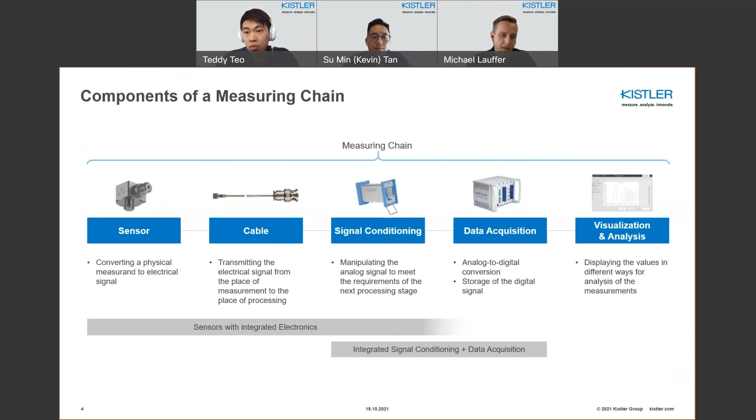So if you have the task to measure something, to select sensors and electronics and data acquisition and so on, to get some data, what do you do? You have to think about what you really need. And for that, we have a little checklist, and I hope this helps.

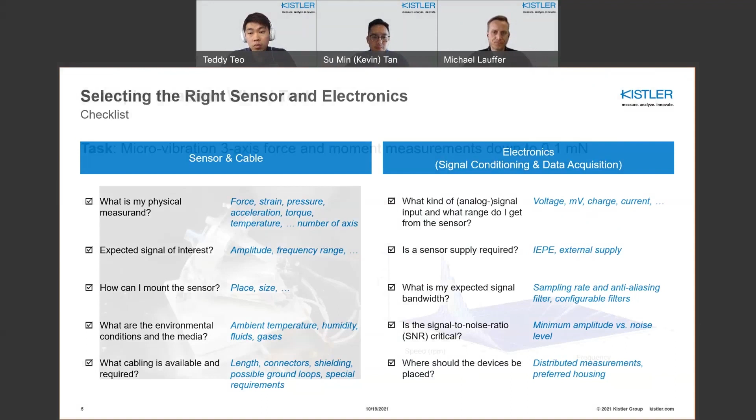So this for the checklist. So in the next couple of slides, we will go through an application as an example. And I've selected this very nice application about a reaction wheel test. That's this device here on the left side. And actually, it's about satellites, so space application.

You may know that nearly every satellite has a so-called reaction wheel. That's a rotating mass inside, which is used to do the fine positioning of the satellite. So if this rotating mass is rotating slower, then the satellite goes in the one direction. If it's rotating faster, then it's going in the other direction. So that's the main purpose of this reaction wheel.

Now if we assume that's a satellite which takes pictures from the Earth, maybe for weather observations, or just for doing photographs of your country, then it's very, very important that the satellite remains really stable in space. So every little vibration on the satellite would harm the quality of the picture. So it's really crucial here that this rotating part is not influencing the satellite with these micro vibrations.

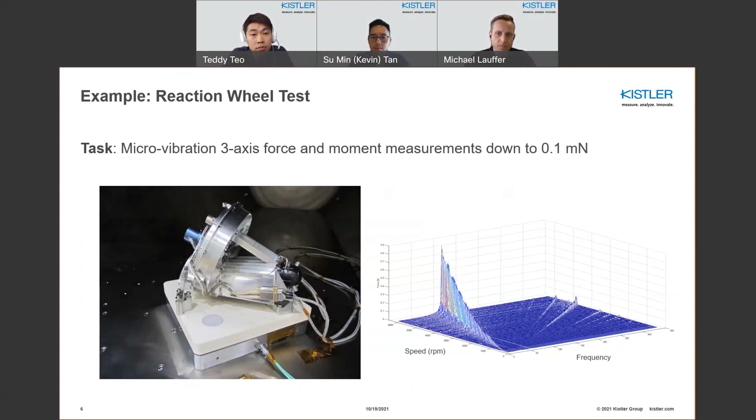And the goal here is, first of all, to measure all these vibrations, and second, to find ways to reduce these vibrations in order to have a better quality of the satellite pictures in the end. So that's a short introduction about the application, and we will go now step by step, selecting the right components for that. So first of all, let's start with the sensor.

Here I have again the checklist for the sensor selection with already the results or the conclusions. So for this application, we want to measure forces and moments. For that, you could use strain gauge sensors or our piezoelectric dynamometers, like here in the example. That's exactly the point here.

What's my expected signal? In this case, they're really small vibrations. We know from experience that the measured forces are in the range of 0.1 millinewtons. That's not a typo, that's really millinewtons, up to 1 Newton. So really small signals. But this whole installation with the rotating wheel has its own mass. So if we placed such a mass on a standard strain gauge sensor, we would measure mainly this mass, but not the vibration.

So here our Kistler piezoelectric technology really has advantages: we can place the mass here and do like a tare. And then we can really measure all the small, really tiny forces. So it's really an important step here. So in this case, how can I mount the sensor, where is it placed? In this case, it's a laboratory measurement. So I need a little bit of space to place the sensor and the satellite part.

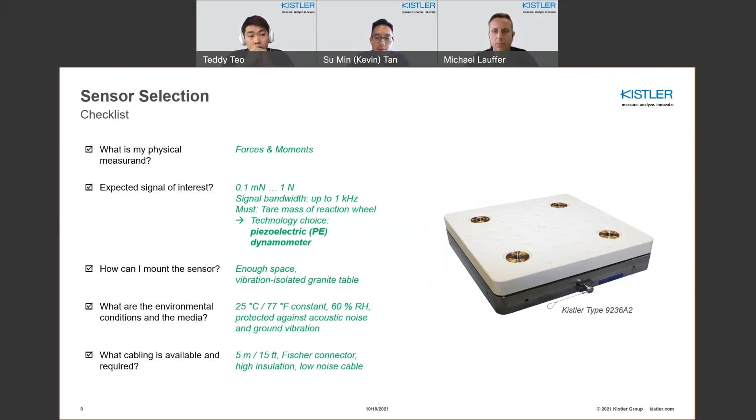As I mentioned, for piezoelectric sensors, you maybe know, if you work with them, that we need a high insulation cable, just to prevent the signal from drift. It's no big deal. But also maybe important is that if you move such cables, they can introduce noise. So it's important to keep the cable from moving, or to use low noise cables. That may be important depending on the application.

And also here, not only with charge signals from piezoelectric sensors, but also with other signals, voltage signals, cable length may have an importance. Cable capacitance may reduce the frequency range on one hand, and may also increase the noise level. So as I said in the introduction, the cable may be important, so take care about that.

General statement here for charge measurement is up to 30-meter cable length with frequencies below 50 kilohertz and charge values above 500 picocoulombs. That's no big deal, but just to keep in mind, think about it and clarify if this is the case.

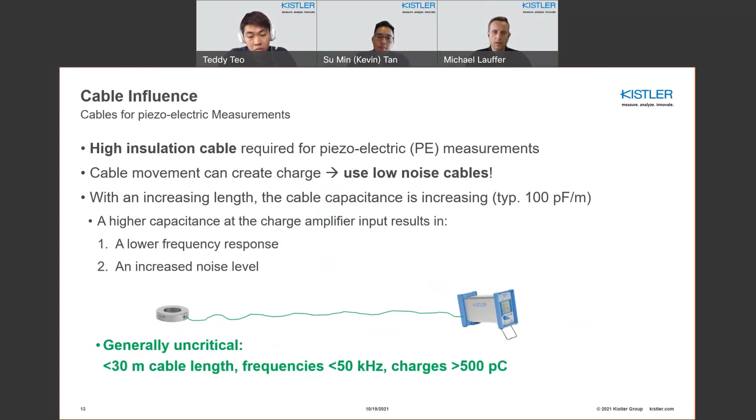So the next component in this measuring chain is the signal conditioning part. And I mentioned that nowadays most of the electronics include signal conditioning and data acquisition. But exactly for this example, it makes sense to use a dedicated signal conditioning device, and I'll just explain why.

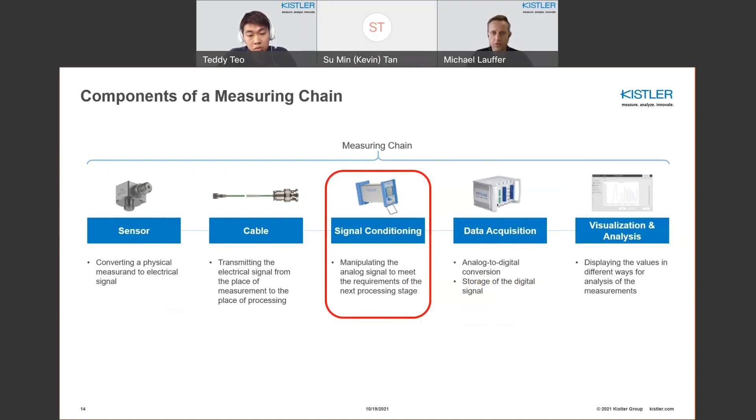Again, here with this very, very small signal we have, 0.1 millinewtons up to 1 Newton, we expect a charge range from the sensor from, I have to read the numbers, 0.0004 picocoulomb up to 10 picocoulomb. That's a very, very small amount of charge. That's some electrons, not many more, let's say it like this.

The advantage of a charge sensor is you don't need a power supply. It's kind of an active sensor. If you press the sensor, it generates this charge automatically. I will explain it on the next slide. The expected signal bandwidth here is 1 kilohertz. So the rotating speed is not that fast, maybe 10, 100 rotations per minute. So not that high signal bandwidth expected.

So 1 kilohertz signal bandwidth, as a rule of thumb, you would have to choose the sampling rate 5 to 10 times higher. So we go with 10 kilosamples in this application. And linked to this very, very small charge range, signal to noise ratio is very critical here.

So that's why we've chosen this Kistler charge amplifier, which is really the best in class amplifier. And I don't say that only because I work for Kistler. That's really the best charge amplifier which you can get on the market. It's also not cheap, I have to confess. So for this application, this is really critical, so this is the way to go. Therefore, an external device, really a dedicated charge amplifier and not integrated. Again, if the application is not that critical, an integrated charge amplifier is also okay.

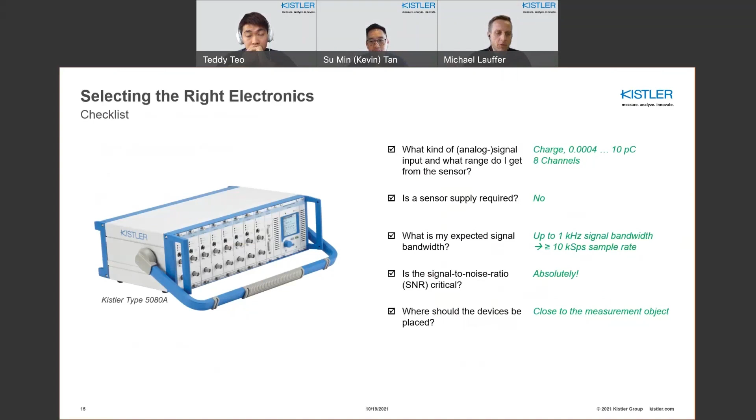So then I digress just for one slide, for those of you who are not really familiar with the charge technology. So we have here the principle of a charge sensor and a charge amplifier. The charge sensor consists of a crystal, or how it's called, maybe you can help me with the English name. Yeah, a crystal. It's a piezo element, which generates a very small charge if you apply a force or pressure or something like that on it.

So with every force, it generates a negative charge value, here in this sine wave simplified. So force, and then we have a charge value. And charge is kind of a special electrical signal. You can't measure that directly. So therefore, you need this charge amplifier. The principle is actually quite simple. That's an amplifier stage which is built as an integrating amplifier, actually an inverting integrator.

So the charge is flowing from this sensor into this capacitor. That's a so-called range capacitor, and this generates the output voltage in the end. And since it's an inverting integrator, the negative charge signal we get out of a positive force will result in a positive voltage in the end. That's the good thing about that.

Okay, so let's go to the next slide. I've said in this application, noise is very critical. I don't want to go into detail here about noise because it could be really a huge topic. Just a short introduction. If you compare the electronics or also sensors and so on with noise values, it's helpful to remember these 3 types of noise specifications.

So the first one is actually very simple to understand. If you measure the noise over a certain time, we just look at the signal and read out the peak value. That's easy to measure. The difficulty here is the longer you would measure, there would be somewhere a real big spike, and if you measure just for 10 seconds, 30 seconds and define the noise specification, then you don't get everything which can occur. So maybe here it's a big spike, which would really increase the peak-to-peak value. So it's, as I said, easy to understand, but not very good to describe noise specification.

Second possibility to specify noise, and that's my favorite one actually, is the so-called RMS, root mean square. So the noise signal is kind of recorded, and then the square root of all the values is generated, which creates kind of this mean value, this root mean square value.

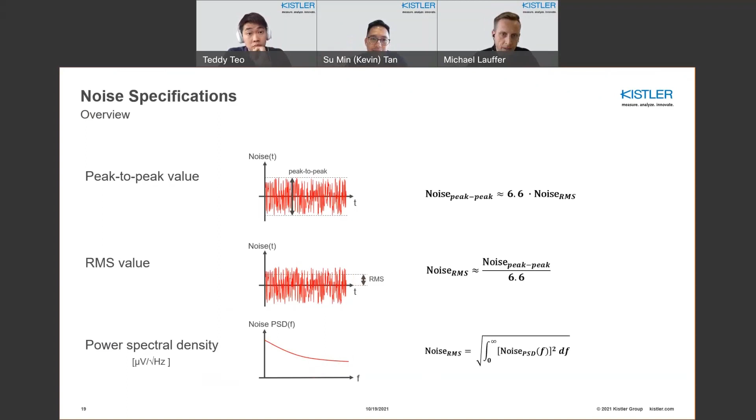Just a little hint or a little trick. If you want to compare the noise values, and if you compare it mainly with the RMS value, there's a rule of thumb. If you have a peak value, you can divide it by roughly 6.6, and then you have approximately the RMS value. That's really a rule of thumb, which is true for real white noise, but in the real world you don't have 100% white noise, so it's really an approximation.

If you have values from this power spectral density, then you would need to take the square root of the integration of all these noise values. Yeah, you can calculate that, it's possible, but it's also not easy to understand this whole specification here, because the unit of such a noise value is microvolt per square root hertz. I can't imagine that, so that's why my preferred specification is RMS. Okay, so I go ahead.

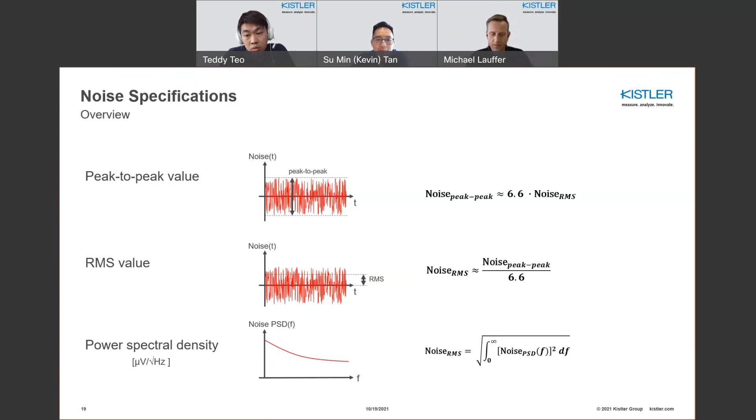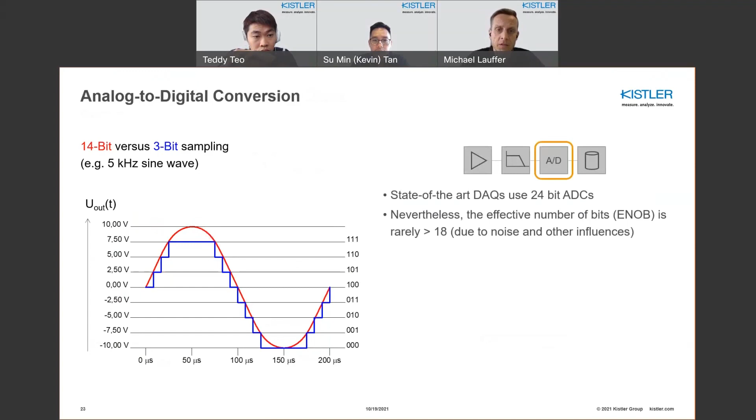That's fine. And actually, we can say state-of-the-art data acquisition systems have already 24 bits. In the end, with the noise which is in the whole system, the effective number of bits is maybe 18 or slightly above. So if you have 24 bits, that's far more than enough.

The second important characteristic of AD conversion is the sampling rate. So that's actually the horizontal resolution. You probably know it: how many samples, how many values per second I get from the ADC. Most of the time it's configurable in the data acquisition system.

Here the thing to consider is more is always better on one hand, so you get a better resolution. Also to fulfill the Nyquist-Shannon theorem, which says that you need a sampling rate which is at least twice the expected signal bandwidth. So from this perspective, higher is always better. But you have also to consider, especially for longer measurements, the more samples you take, the more data it generates.

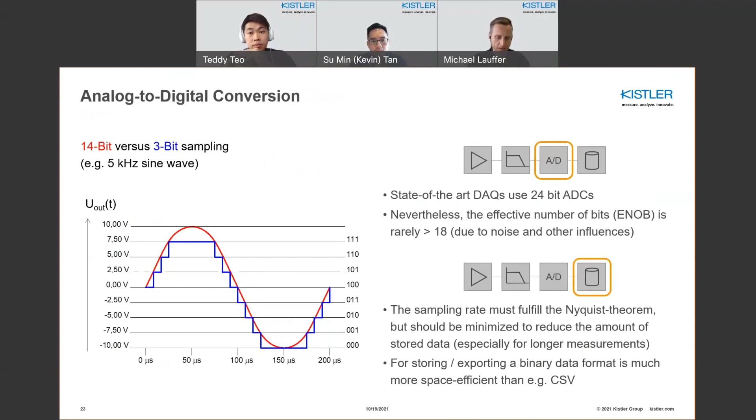Okay, so I mentioned the Nyquist-Shannon theorem. So from the theory, we know that the sampling rate must be at least twice the expected analog bandwidth, where we apply the anti-aliasing filter. That's a different topic, would be also worth a special webinar. So at least twice; in practice, actually, because the anti-aliasing filters are not ideal, we recommend to have a sampling rate which is about 5 to 10 times higher than the expected signal bandwidth.

And one kind of personal statement here, I always try to really distinguish between the analog bandwidth, which is expressed in hertz, and the sampling rate, which is expressed in samples per second. It's not wrong to express it in hertz, but I like to really distinguish, and I always talk about hertz of analog bandwidth and samples per second if it's about sampling frequency. This helps to use different units for these different values, because it's really not the same. Okay. So far to some little theory.

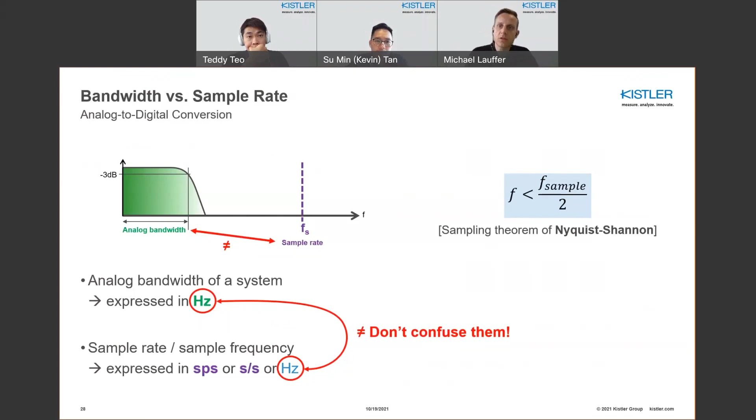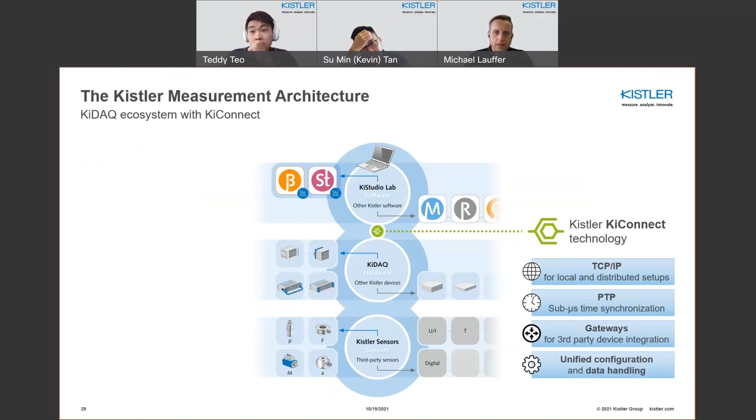Just a word or two about the software, the KiStudio Lab software. We built it to have an easy configuration, so it's really easy to handle. You just go through from left to right, and then you're done with the whole setup. That's really easy, and you can do live graphs, some simple analysis, and you can define triggers when to record the measurement, and so on.

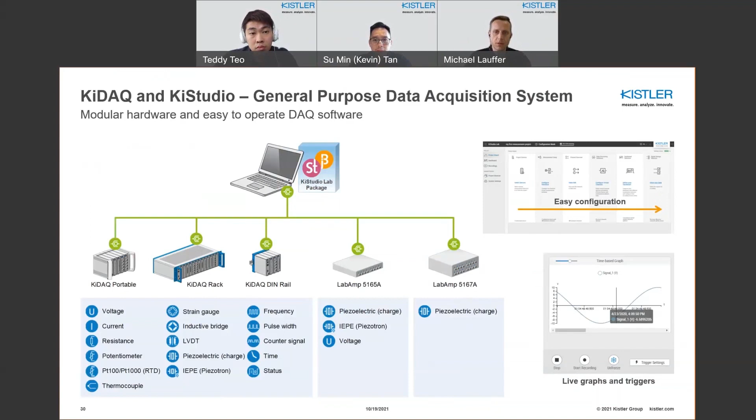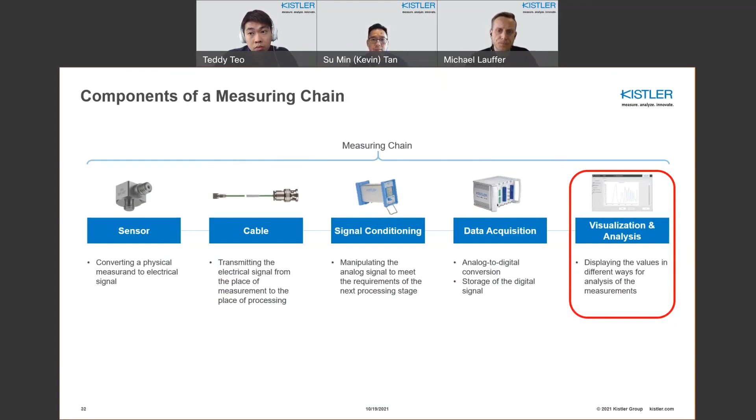So I move on to the last part of the theory or the introduction: visualization and analysis. That's actually the important thing in the end. That's the goal of the whole measurement, to have data to analyze, to innovate in the end, to draw conclusions and so on. For the visualization and analysis, we provide our jBEAM software. It's really a powerful tool, and we will see a live demo in a couple of minutes.

A really powerful tool with interactive analysis and automated reports. And I just want to explain this graph on this slide. Where is this software positioned in the market? We see many customers who are using Excel, for example, or another, how is it called, you know what I mean, a spreadsheet tool. I missed the word spreadsheet. So spreadsheet tools. Yes, you can use them to analyze measurement data, but they're really not intended for that.

Excel or the spreadsheet tools are intended for business data, financial data, financial business cases, controlling and stuff like that. It's really not for measurement data. That's not the right tool. On the other hand, we have very special tools like math tools like MATLAB, Octave, or measurement tools like LabVIEW. They're widely used in the world, and yes, they have their advantages. I have to confess that.

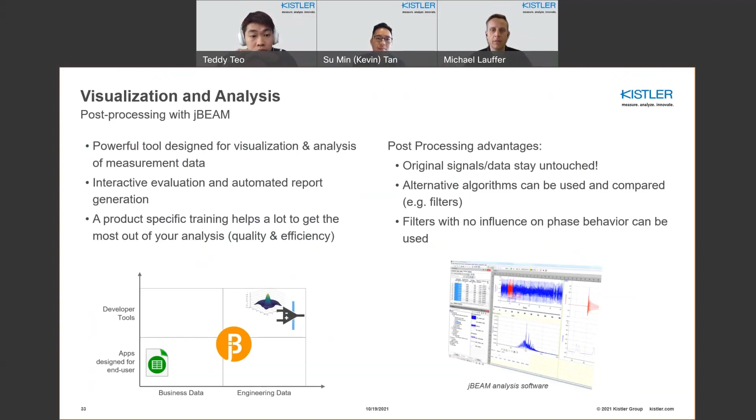Maybe a short comparison from jBEAM to MATLAB, a couple of features which are important from my point of view. First of all, import possibilities. With jBEAM, we support over 100 data formats, in comparison to MATLAB, which supports only standard data formats. Okay, you could do other data formats, but you would need external scripts for that.

Then, important from my point of view, quick measurement data analysis. Yes, with jBEAM you can do that. You just drag and drop the signals into the graph area, and then you see it. You can add analysis cursors really quickly for the analysis. In contrast to MATLAB, okay, a pro user is also quick, but then you're really a pro already and you do the programming quickly. But if you don't use it on a daily basis, you always need time to learn the syntax and so on.

Same for using formulas. With jBEAM, you just select and click the values you want to calculate, and you create your simple formulas. Here with MATLAB, it's only possible with programming. But I have to confess, it has a really extensive function set.

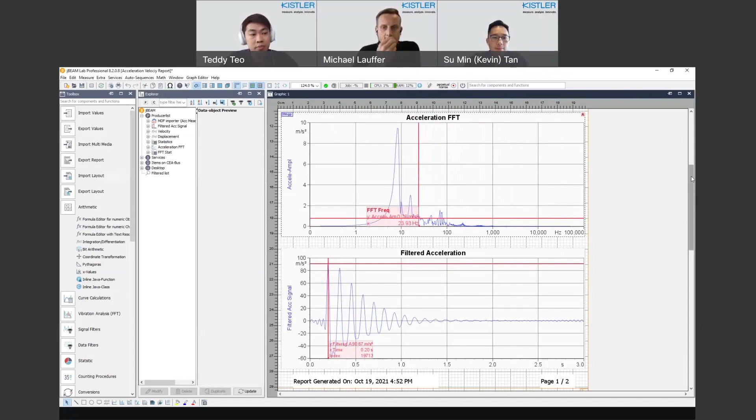So I set an interactive input for my low pass filter. That means that the frequency for my low pass filter is set by this cursor here. As I slowly move it to the left, we can see in real time that I'm filtering out more of the noise and my signal gets smoother. So I'll stop about here, and now I have my filtered acceleration signal without the noise, and I'm ready for more analysis.

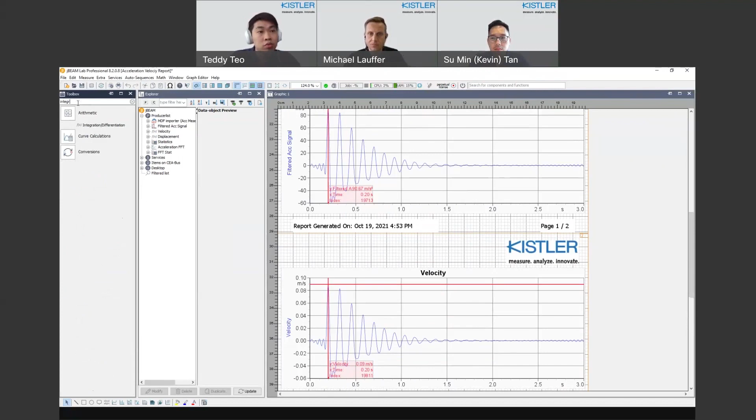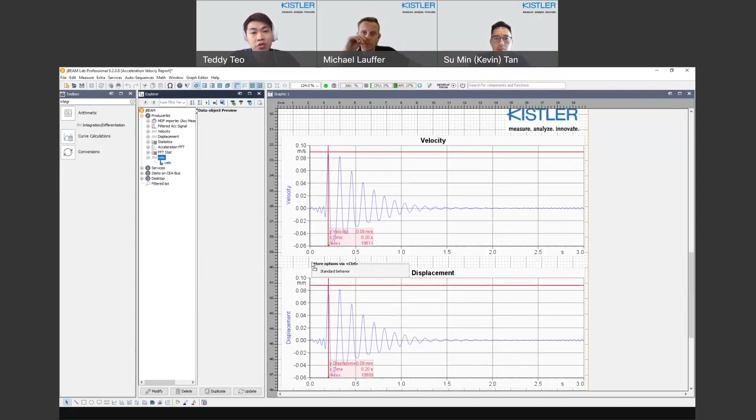Next, I would like to integrate the acceleration signal here to get a velocity signal. Doing this in jBEAM is just as simple as finding the integration tool, typing a name for my result, selecting the input data, selecting integration, and clicking OK. And just like that, I can drag and drop, and there it is. I have my velocity signal.

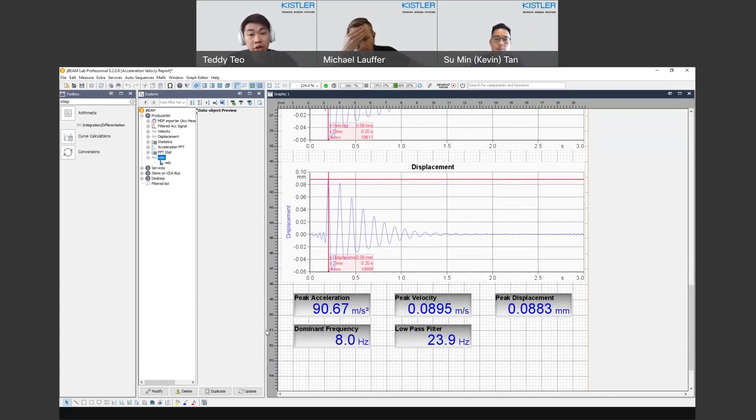And it is the same graph as what I created here earlier with the same steps. So let me remove this. And now with the velocity graph, I can repeat the integration steps to get a displacement graph as well. And finally, I set up a few displays here to show some key values: the peak acceleration, the peak velocity, the peak displacement, my dominant frequency, and also my low pass filter frequency.

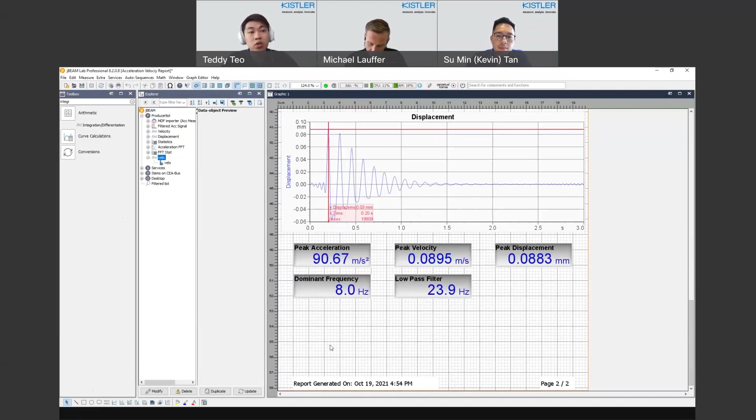And after getting the data that I want, I can export all this into a PDF report. Go in here and export a PDF document. So export. And now we have it. This is the PDF document. So this document looks exactly like...

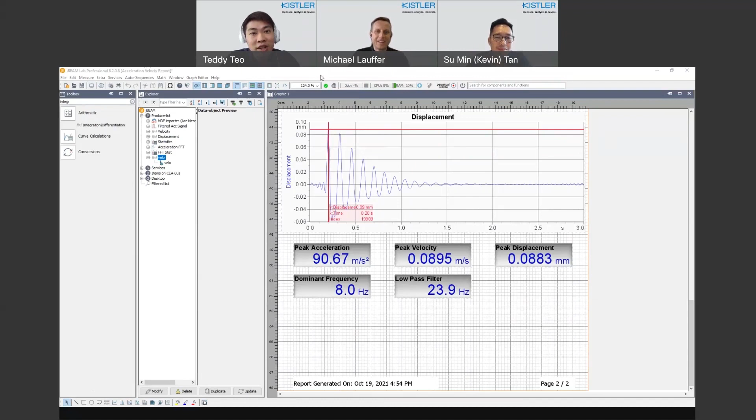We don't see the PDF document because you share only jBEAM. Sorry about that. Okay. So you see the document? Okay. Yes, now it's visible.

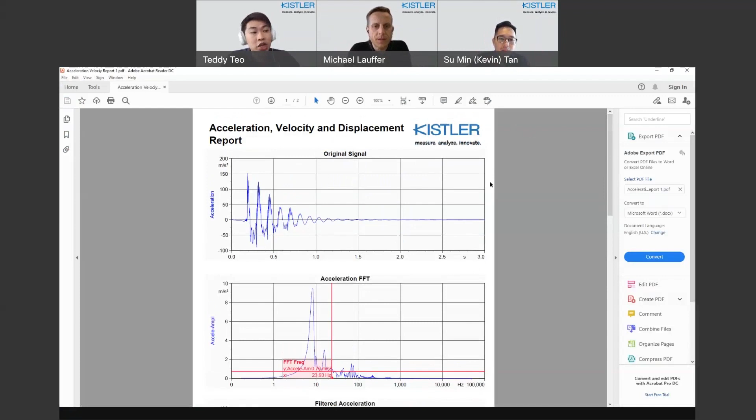Yeah. This is my PDF document, and it looks exactly like what I have set up in jBEAM. So I have the original signal, my FFT, my filtered signal, the velocity, displacement, and my key values, together with the report generation date and time at the bottom.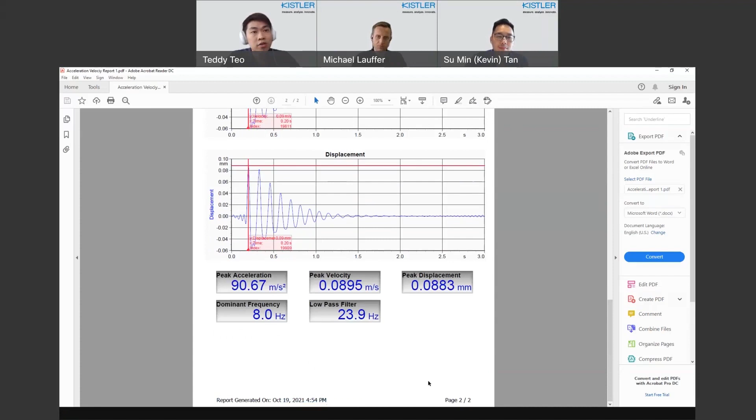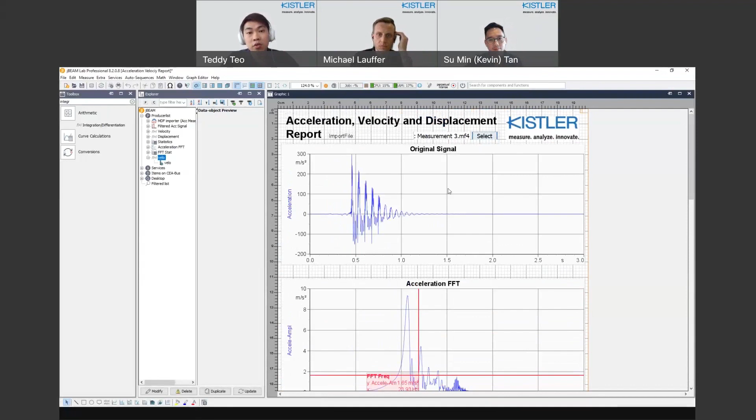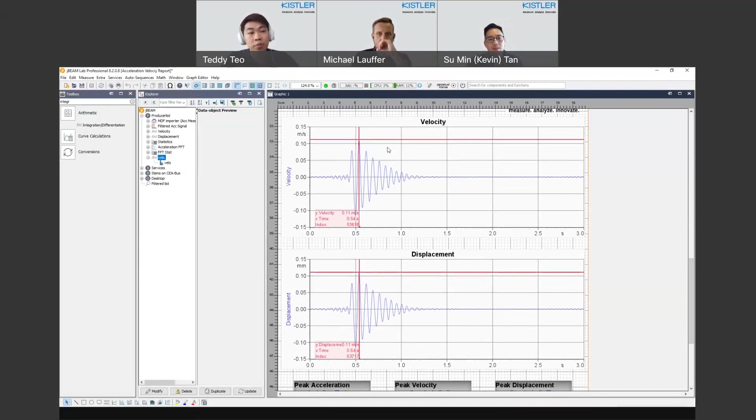So back to jBEAM, I have made multiple acceleration measurements, and I can easily and quickly do the same analysis I've done on the latter measurement data by importing another file. And now with a new acceleration signal, all my graphs here are updated automatically, and I can just quickly generate a report like before on my new data. And all this is done in just about half an hour in jBEAM. And this concludes my jBEAM demo.

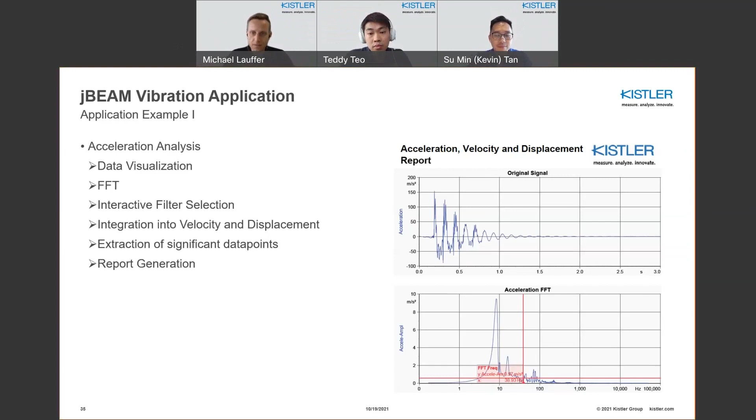Good. We're nearly at the end of our session. Just a couple more slides. The first one is just to underline the versatility of jBEAM.

Yeah, with a very different application. So some of our customers use jBEAM also for engine-related tasks like combustion analysis and so on. So we see here the use cases where it is used. Yeah, this takes a little more to set up all the graphs, of course, but it's possible with jBEAM. Just to show that it's really versatile and you can use it for very different things.

Of course, for engine applications, we have our Kistler KiBox. Maybe you know that if you're working in this part. So we don't want to compete with that. The KiBox is really also a nice tool for engine applications. But if you just do something as a one-time thing, you can also use jBEAM. It has more flexibility to use your own formulas, you can do more of your own calculations and views, in contrast to KiBox, which has predefined setups, which makes it easier to do all the standard measurements. Let's say it like this.

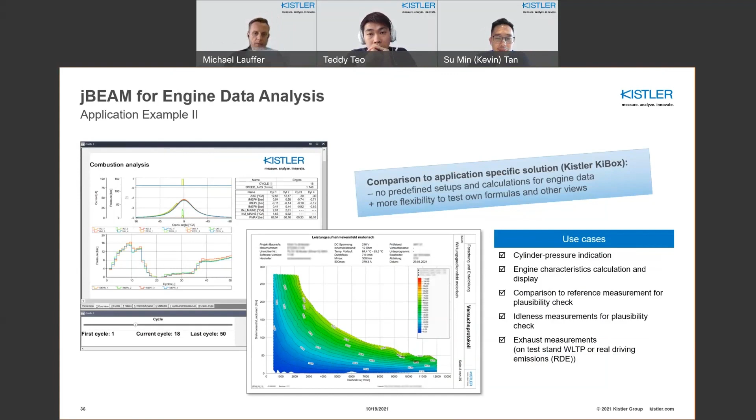Okay, so as a summary, we go a step back. If you think again about the application we introduced in the beginning, the microvibration with this reaction wheel, as a summary of the whole selection of the measuring chain: we had this reaction wheel which requires measuring very low forces with the sensor, a quartz dynamometer. We talked about the cable, which might be very important regarding noise, electromagnetic influences, and so on. Signal conditioning, which is important generally, and especially in this application with this high requirement regarding signal to noise ratio.

We talked shortly about data acquisition, our KiDAQ data acquisition system, which can handle hundreds of channels depending on the sampling rate and can go up to 100 kilo samples. And we've just seen the visualization and analysis with jBEAM. Kevin stated this sentence already in the introduction, and I think it's really an important statement: a measuring chain is only a chain, and therefore it's only as strong as its weakest link.